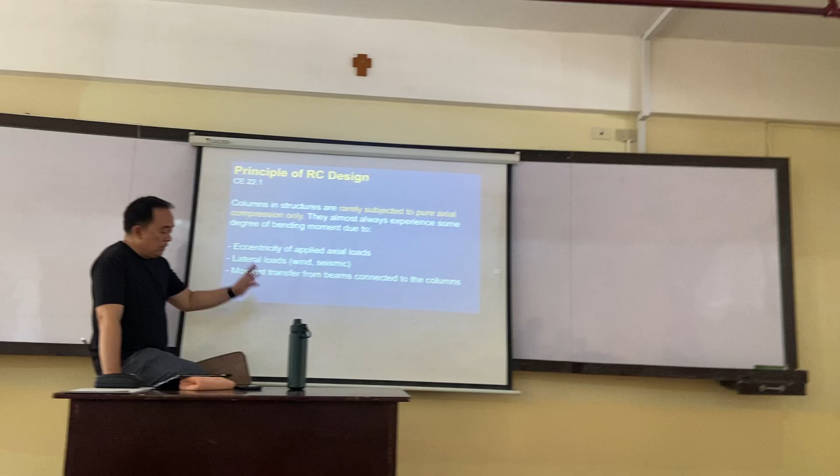It will depend on the... it doesn't mean na kung short ang inyong building, lang siya, because there are some frequencies, natural periods that we need to consider both sa structure and sa soil. So it doesn't follow nung ang buo ang inyong building atin ang magamit sa code. So you will learn more of that when you reach earthquake engineering.

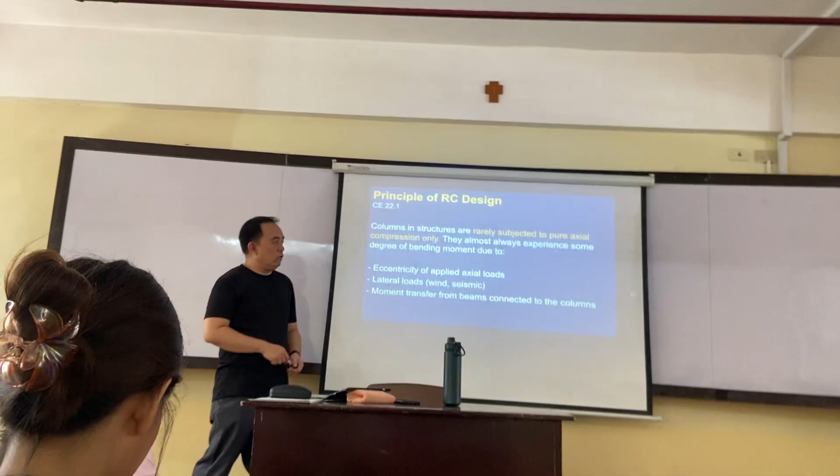And another reason for our bending moment is for your moment transfer from beams. So you had this in your C15. Let's say na ito dia or napakay. If you're going to analyze that using approximate analysis, eventually na kami makakuha kaya na may pasan dito sa graph. So in that case, your columns would actually have some deflections happening. That's why there's almost zero possibility that your columns will be in pure axial.

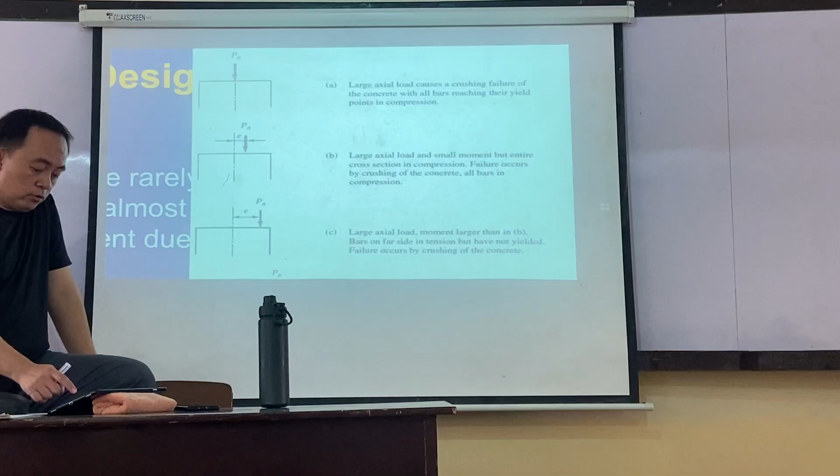Okay, so for the eccentricity of applied loads, we have here something like this. Of course, theoretically the loading will pass through the centroid. We already know that. And then, if there will be an introduction of small eccentricity, it will have a large axial load but small moment. So the failure will occur by crushing. So it's almost the same, crushing po siya. So wala kayo problema if gamay ang atong eccentricity.

And then of course, as the eccentricity will increase and eventually it will be too large, in that case your column will now behave as a beam and it will fail as a beam. So dapat siya that time to control in case there are very large moments. So of course we want our columns to be compression controlled because compression will be axial.

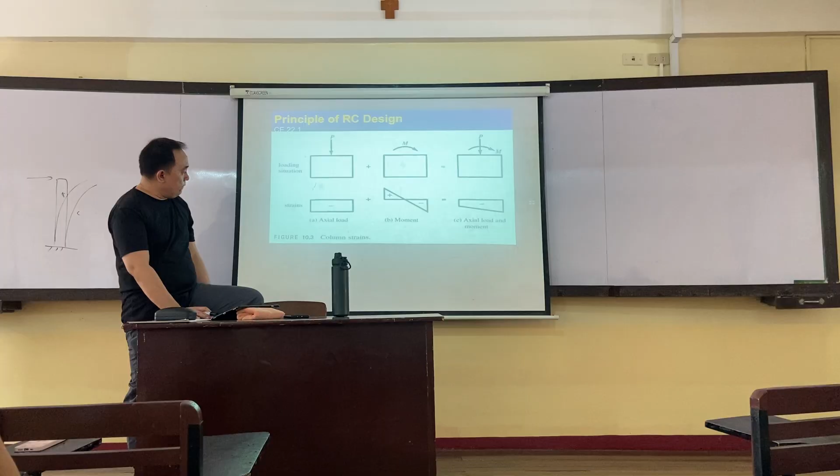Okay, so these are the column strains. If it's purely axial, you will have something like this, a straight line strain. This is all throughout the section. But if you introduce moments, I think you're familiar with this. So you will have some strain both sa concrete and the steel. But this is just for the strain sa mga outer fibers, steel fibers and concrete.

And eventually, if we will combine that as a superposition, you would have something like that. The axial loads and the moments where it will have something trapezoidal, if you're going to add this. And of course, you have different values of your axial loads and different values of your moment, even with the same cross section. And so there will be some variations in between. P plus M.

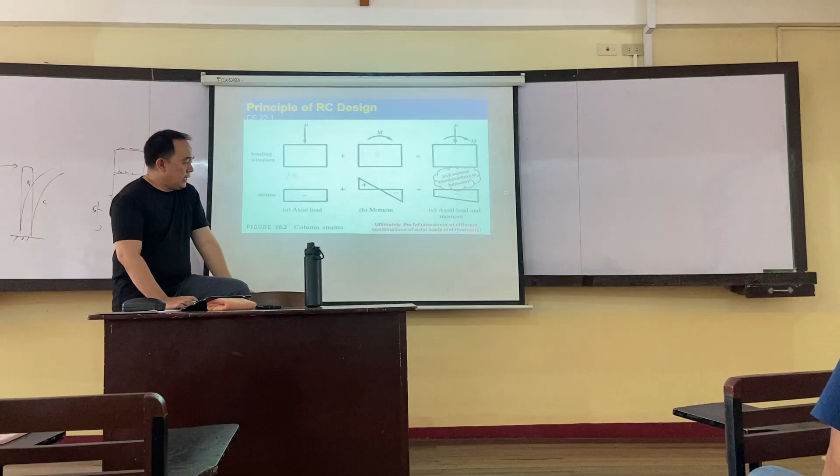And ultimately the failure will occur at different combinations. So pwedeng gamay si P, dako si M, pwedeng dako si P, gamay si M, or somewhere in between. So isa na combination of your P and M. So the way to simplify or medyo musayon na ang atong computation is to approximate our column capacity with the use of this column interaction diagram.

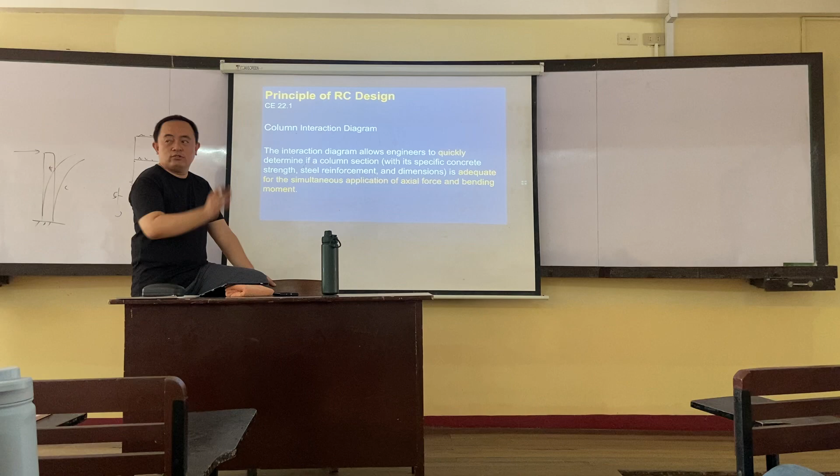Kung RCD na graph. Mga ni-indicate mo nila graph sila kuha sa PM o sa number of rebars required for a particular column. So what's this column interaction diagram? This allows engineers to quickly determine if a column section is adequate for the simultaneous application of axial force and bending moment. Once an interaction diagram is generated for a specific column, we highlight this because this is the problem with interaction diagrams.

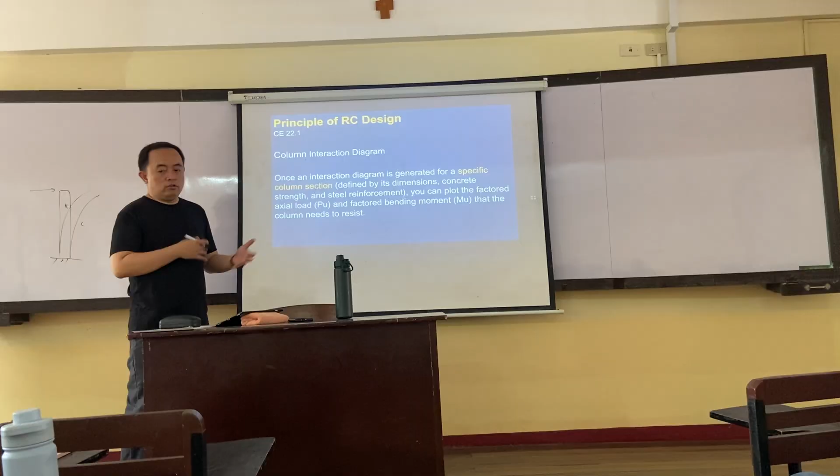So need siya to use a specific column, f'c, material properties, symmetry, steel properties, fy, and something to do also with the ratios and the dimensions of your column. So there are dimensions, strength, and steel reinforcement and strength. So there are parameters that need to be consistent between the column that you're designing and the one you will see in the interaction diagram. Dapat coincide siya in a way.

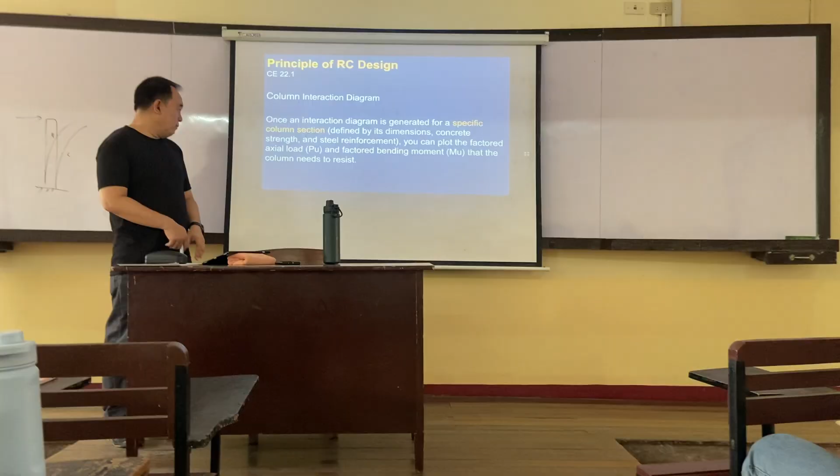So once you have that diagram or interaction curve from other sources, you can plot the factored axial load and factored bending moment that your column will need to resist. Actually, di man necessary na factored. Pwede man siya NM or PM. In fact, the axes of that are P and M. If you want to introduce reduction factors, you can have your Pu and Mu. So it should look something like this.

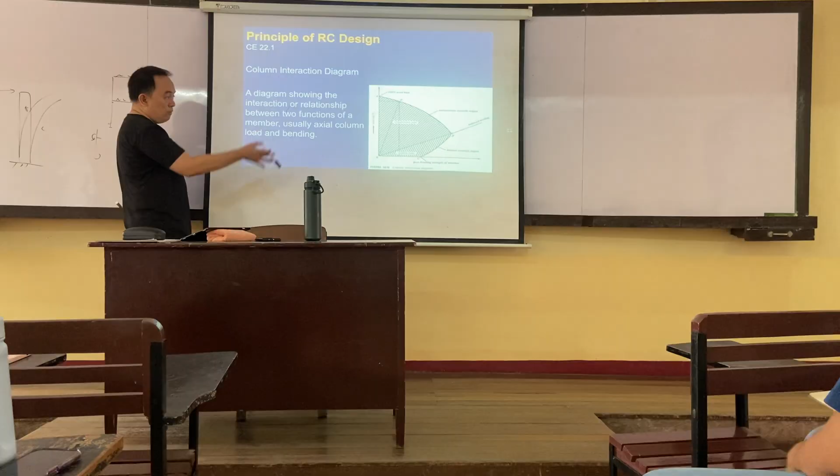Although this is the generic form, just to introduce you to the components of your interaction diagram. Okay? So, your interaction diagram by definition is a diagram showing the interaction or relationship between two functions. So, on the sides, you will have your axial loads and your moment. Okay, and then somewhere in between, you will have some combinations of your axial load and bending moments.

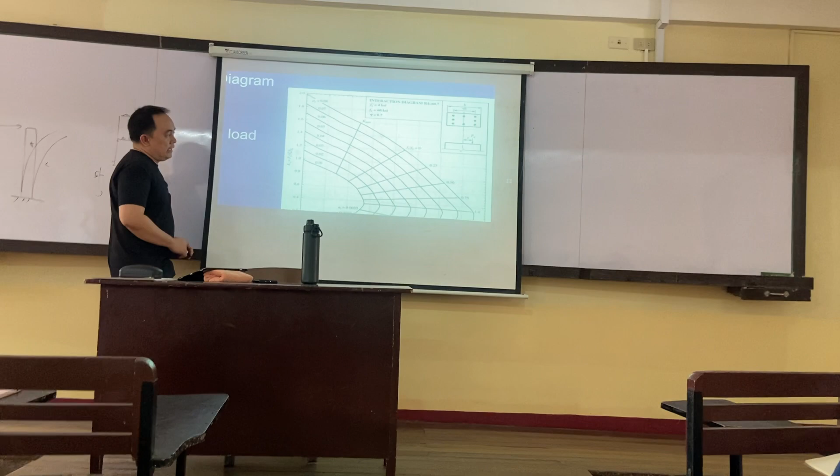Okay, and then of course, to properly use our diagram, we will have something like this, which will be generic to most of the columns. For example, in this case, if the rebars for a column are spread all throughout the faces, you can use something like this. So likewise, and more of this. Okay, and then of course this one will have your ratio. Okay, so

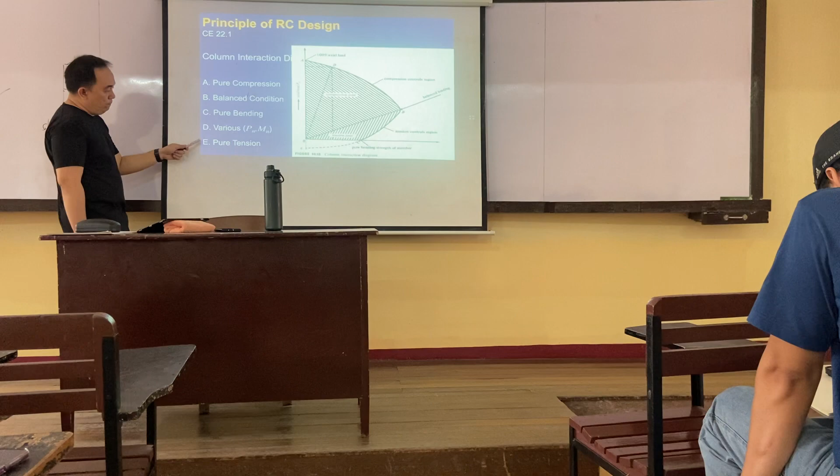Your diagram is generated by various strain distributions, from pure compression to pure tension. So your interaction diagram will have basically 5 zones or 4. You have your pure compression here at the top. The y-axis is for the axial load only, and the x-axis is for the bending or the moment. So of course here you have zero moment, so everything here is purely axial. So you have your compression. And then somewhere down below there is your pure tension, opposite to your pure compression, on the same axis.

Then going there, your columns will now have moments, again due to the eccentricities of your load application. So you will have point C as pure bending, where the y-axis is zero. So you will have your bending. But of course, as with your beam, you will have something like a balanced condition. So balanced loading should be somewhere here, depending on the point. And of course, somewhere in between values, you have your point D here. So that's your interaction curve.

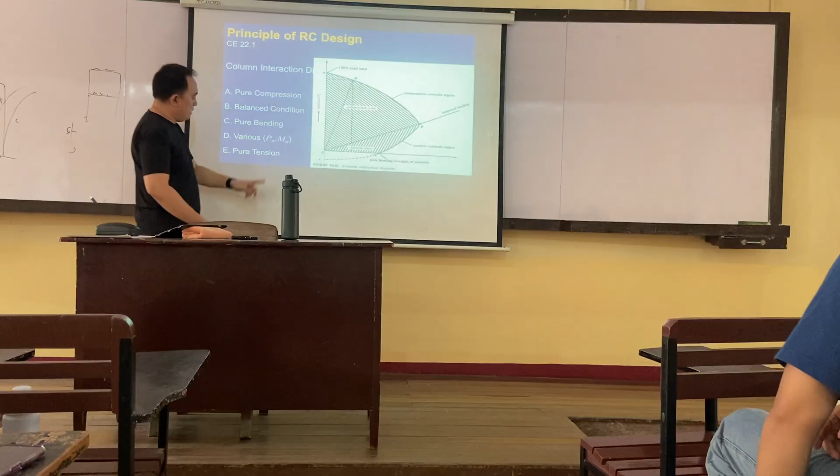The coordinates are Pn and Mn on the axes. And you notice that the pure tension area is in a broken line, because we do not want especially your RC column to be in tension, because concrete is weak in tension. So we do not want our design to be in this portion. And then this is your balance line, balanced condition. Everything above that will be compression, and everything below that will be tension. And then we'll have another line that says everything up will be brittle, everything down ductile.

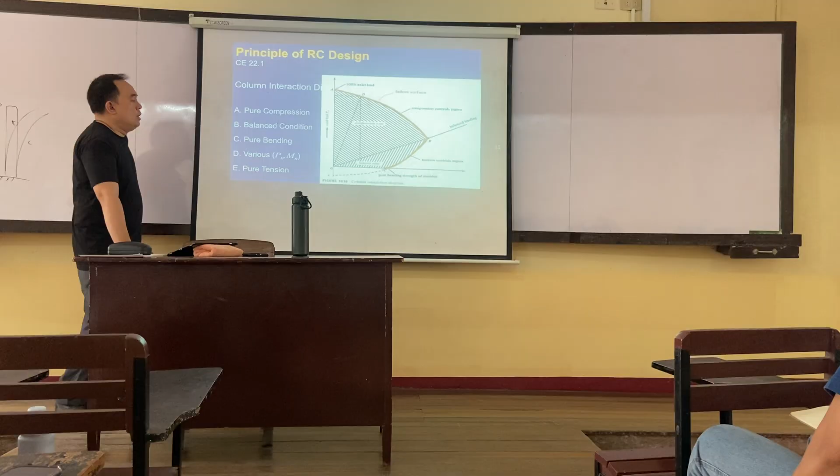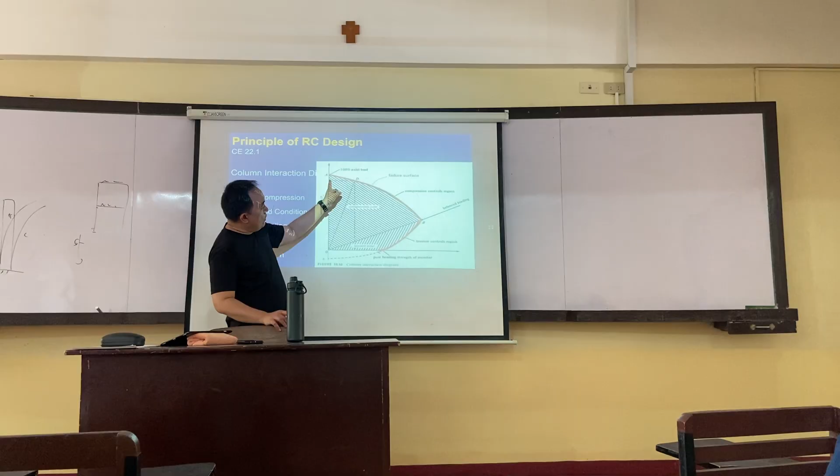And actually your interaction diagram will also tell you the failure surface of your column, basically a boundary of your column, because your interaction diagram will vary from column to column. Each column might have a different interaction diagram, so it will have a different interaction diagram. Regardless, the boundary here will be your failure surface. And whatever the loading or the moment that you're going to compute for a particular column, it should not go beyond that boundary.

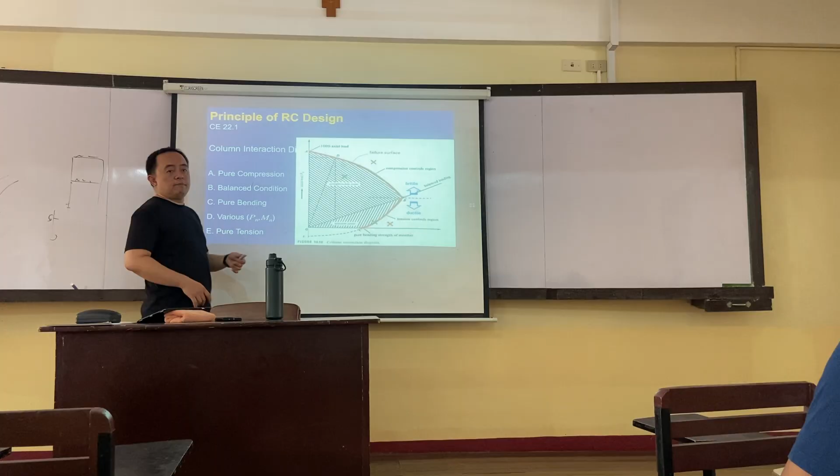So for example, in case your Pn is computed somewhere here, but the moment is too high, you will be outside, so it fails because it goes beyond. If your design is somewhere here, Pn is high but the moment is small. So this is what we should target: large compression, small moment, so that your column will not act as a beam. Especially in the compression zone. If the moment is high and P is small, that's no longer allowed as a column; it acts like a beam. So this is what we identify for our design.

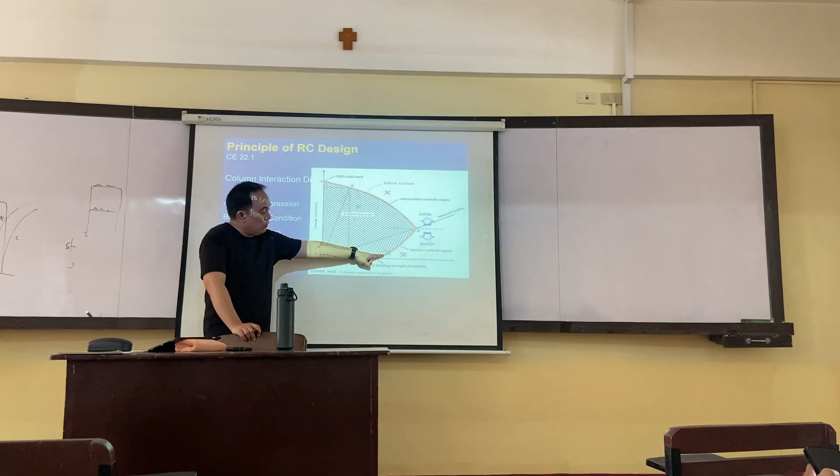Okay. Now what if it's just right on the failure surface? Is it okay? So the answer is yes and no. Because if you notice, these are Pn values and Mn values, the nominal values. So once you introduce your reduction factor for our design, this column will no longer be applicable, because once you introduce reduction factors, your failure surface will go down. Like 65% for a column in compression. So that's the reduction.

So you have your 35% allowance in case something goes wrong. For beams, we have no choice because we need our beams to yield first. But in essence, the beam should fail first before the column. If the column fails first, that's bad for you, because then your structure collapses, even though the beam is intact, the column has already crashed.

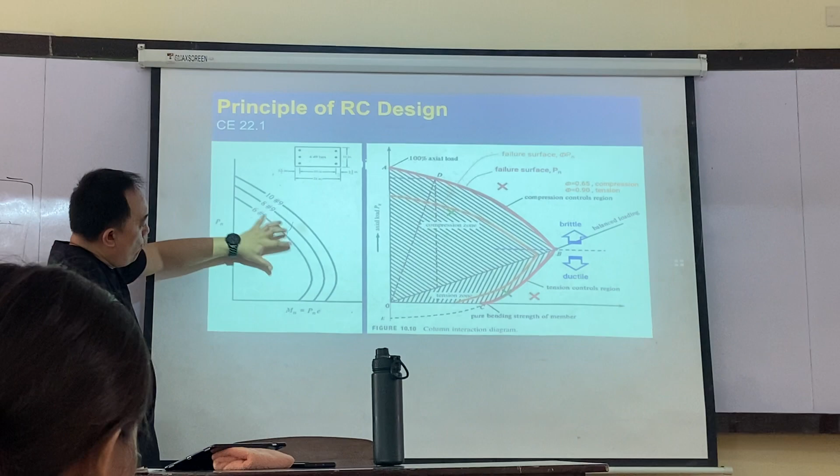So you will have an interaction diagram that should look like this.

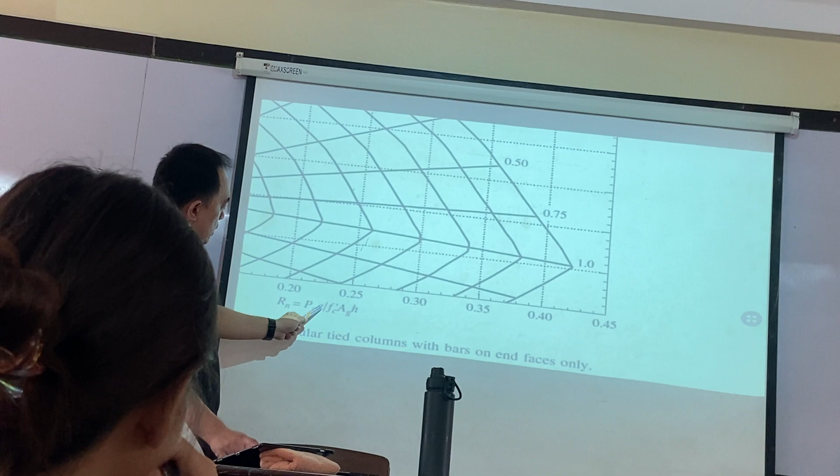We introduce eccentricity for the moment. Of course, our moment is P times E. To have a moment, there must be eccentricity. And of course you will have your H here, because your E will depend on, for example, the center. So our E will depend on the dimensions here. Later on we will have some ratio of that.

So this is somehow a generic interaction diagram for use with rectangular columns, and its configuration for rebars is like that. Rebars can be placed all throughout your column, all four faces - that one is for rebars on all four faces. Or just the end faces only, basically two faces.

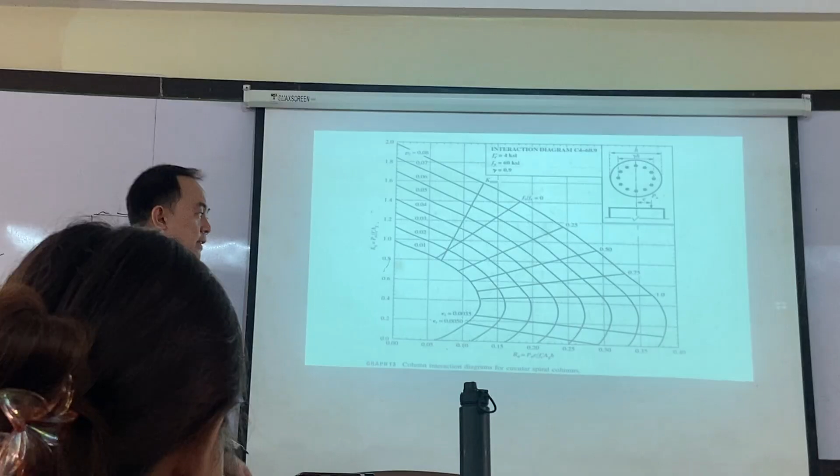And then you will also have circular columns. If the column is circular - if you work with the DPWH code as a bridge designer, our bridge columns are called piers. Most of those are circular columns. So you will have something like that.

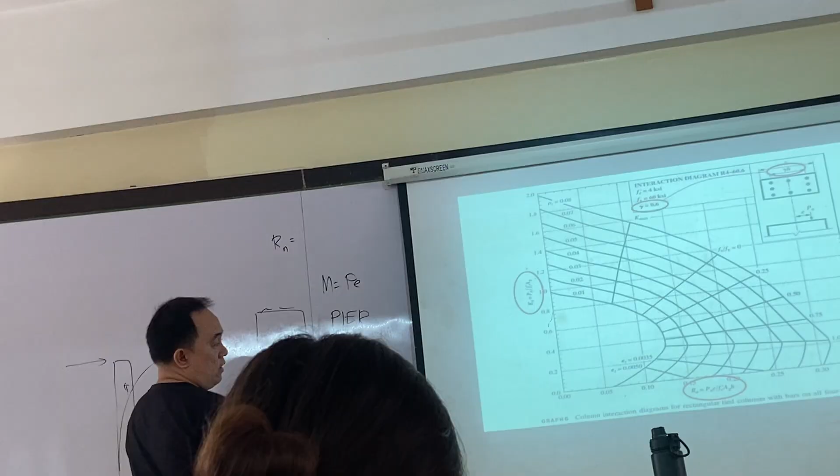Notice here, gamma. Your gamma will be important later to locate your E. So what is this? This gamma here is the ratio between your two H's. The second H will be the centroidal distance of your end bars, versus the overall depth or height of your column.

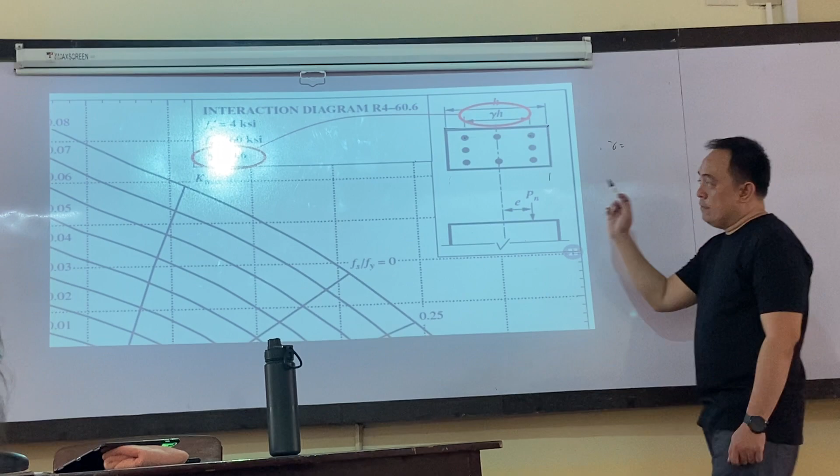So that gamma is always less than 1. So the denominator for the gamma is the smaller one. Let's say this distance here divided by your H gives you your gamma value. This gamma value is one of the things you'll need to know later on how to use your interaction diagram.

In the older versions of our code, you will see that it's a bit outdated, so just in case, we will not use this one. What we'll use is this one instead, which is simpler. This one - just in case it comes out in your review - so take note of it.

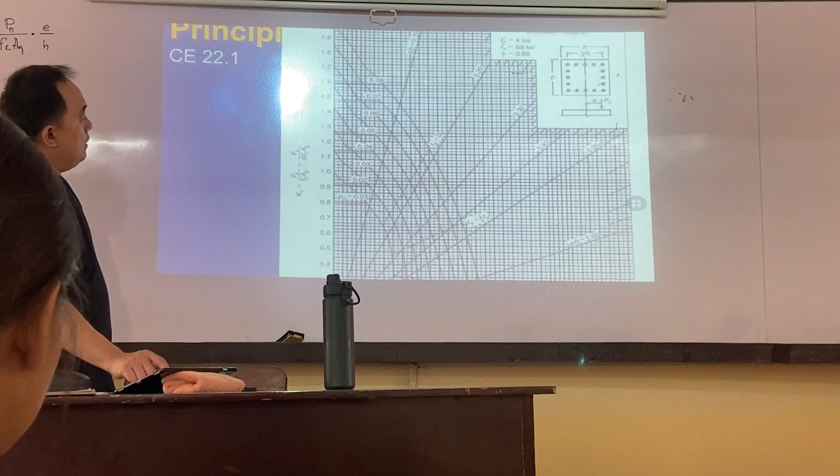So we have here the same - you also have your PN over FC times Ag times your E over H. So it's the same approach, and this one also the same approach. What's different here is way back, the ACI was using the E over H ratio.

So where is that? It's this one - you pick the line here, that's your E over H ratio, which you compute first. Then you find the corresponding value, and then you can compute for your PN. But the idea is the same, though what we're going to use are the newer versions.

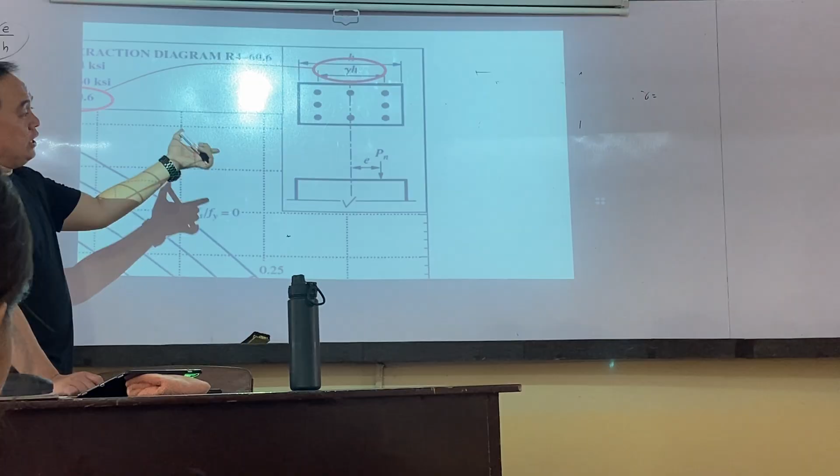So be cautious now - be sure that the column picture at the upper right side of the interaction curve matches the column you're considering. As I said earlier, if your rebars for your column are distributed all around, you will use this column as long as it's rectangular or square. But if by chance your rebars for a rectangular or square column are arranged differently, there are cases where that needs to be done.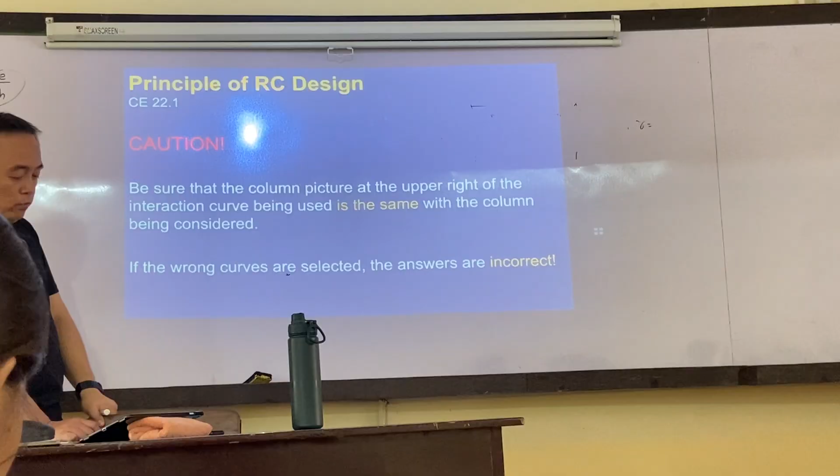You will only use it depending on the design of the column. Okay, and the wrong curves are selected and the answers are, of course, incorrect. So let's have some example on how to use our interaction diagram.

We have to determine the steel reinforcement required for the short column, and it will support the following loads: 1,660 for the axial load and 310 kN for the moment of bending of your column. The bending here is about the stronger axis. So if this is X, this is Y, so the bending about the stronger axis is about X.

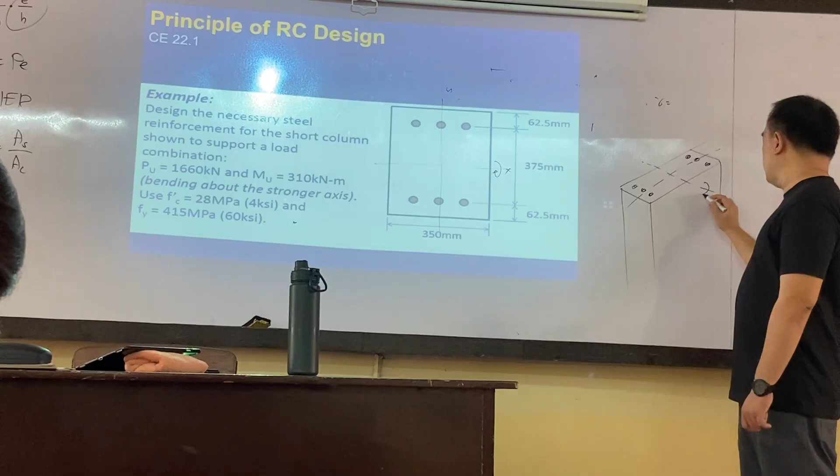By the way, for interaction diagrams, the location of your P, or basically in the discussion for bending, the location of your P is not the regular centroid that we see in the geometric shape. The problem with reinforced concrete is that it's made of two materials. So you have your concrete, and then you also have your steel. So the centroid of those things, steel and concrete, may not always coincide.

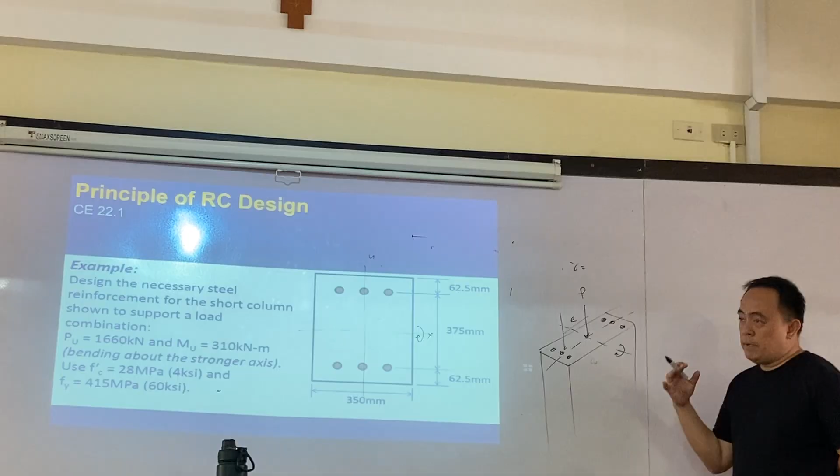It will depend on the shape of your column. So that centroid we're talking about is not the geometric centroid, but rather it's the plastic centroid, not the geometric centroid.

So it will differ based on the number of your rebars and based also on the shape of your concrete. There's a separate discussion for that, but I'll skip it because we do not have time. But in any case, if you recall, I introduced last time an L-shaped column, and...

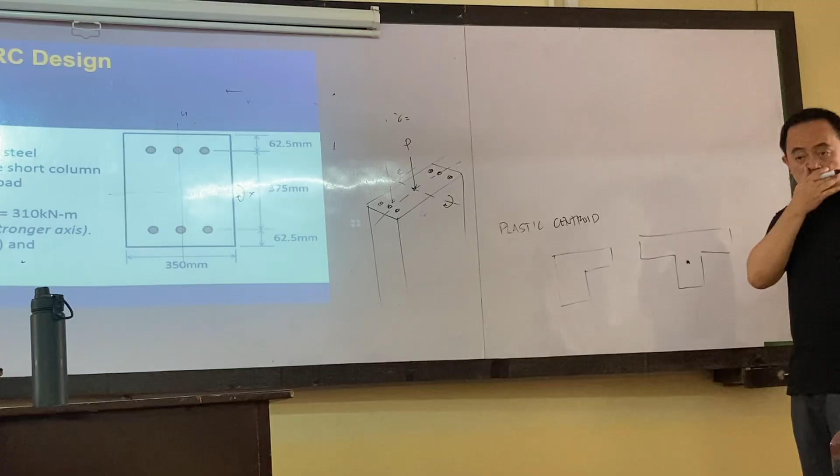...point P. So the geometric center of this is here, right? So if it has rebars, it will no longer be here. It's somewhere here, or maybe here, or I think it's mostly here. But in the case of a rectangular, square, or circular column...

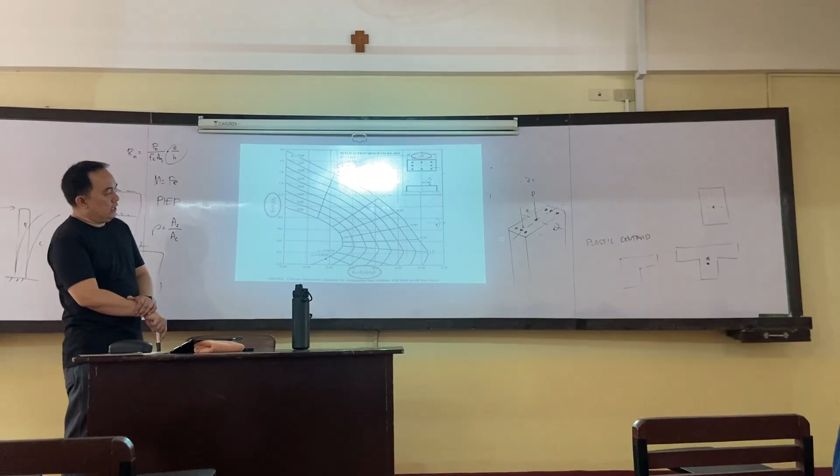Now, one thing you need to consider is that what we have in our book is, of course, taken for American usage, for those who use English units. Unfortunately, the US still uses US or English units, while everyone else around the world is now using SI units.

So in order for us to use this, actually one of our activities was supposed to be to create an interaction diagram using Excel, because we can compute our values here, since it's pure compression.

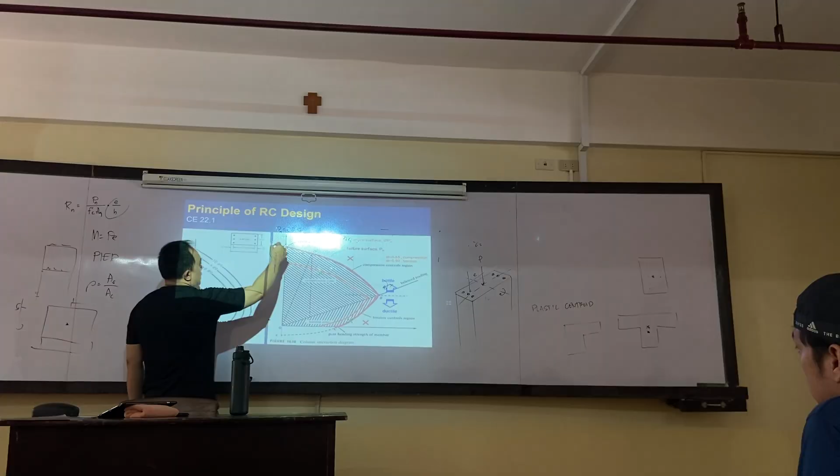So you can use Pn equals 0.8 of Po, where Po is 0.85 f'c times (Ag minus Ast) plus Ast times fy. And then for the Pu, 0.65... So that's the pure compression function, and you can compute for this value here.

For the bending moment, or pure moment, you can also compute that. It's similar, Mn equals As times fy, or if it's in terms of concrete, you will have your 0.85 f'c times b times a, times (d minus a over 2), so that they are consistent, in terms of concrete.

And then you also have your balanced values, whatever they're called, balanced something. So you can compute these things here, and that's why for every column you can have your interaction diagram.

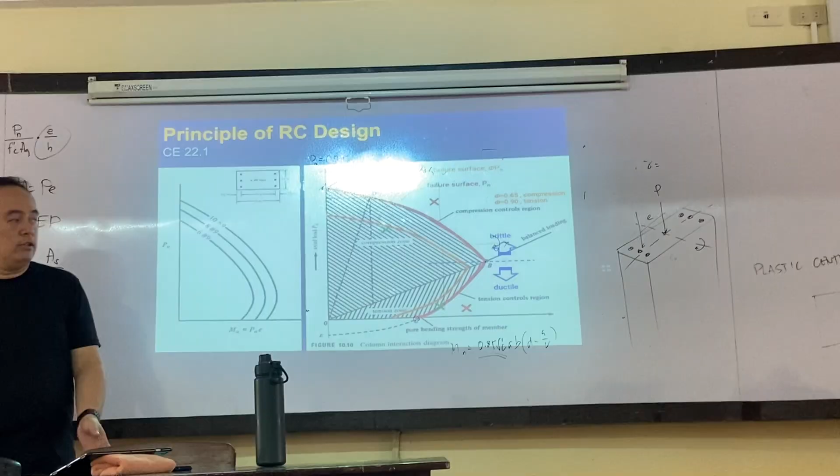So supposedly, that's applicable here. I think some students from a certain class were able to make an Excel sheet with their values, so they could just plug in the values there. But in our case, we don't have that.

So therefore, I'm just going to tell you how to use the interaction diagram directly.

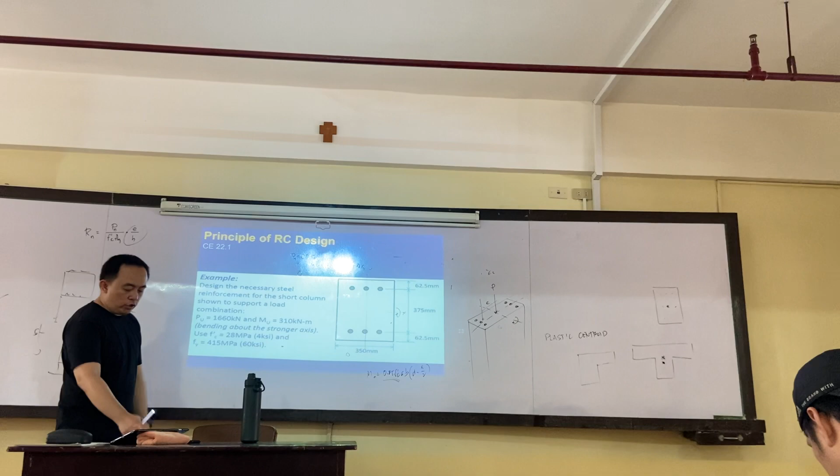Okay. So back here we have our f'c, no? So since English ang atong diagram, we are going to convert it. The diagram will be the one with 4 ksi value. So, okay. And then ang atong fy is dapat 415 or 420. That's for grade 60 or 60 ksi. So, the same thing, 60 ksi. Okay. And then, ang gamma will vary later.

Okay. So, what about if 21 megapascals for grade 40? You cannot use this. Okay. You cannot use that. You need to look for another, or you need to make your own. That's why most examples you will see in the use of interaction diagrams are based on 4 ksi and 60 ksi for f'c and fy.

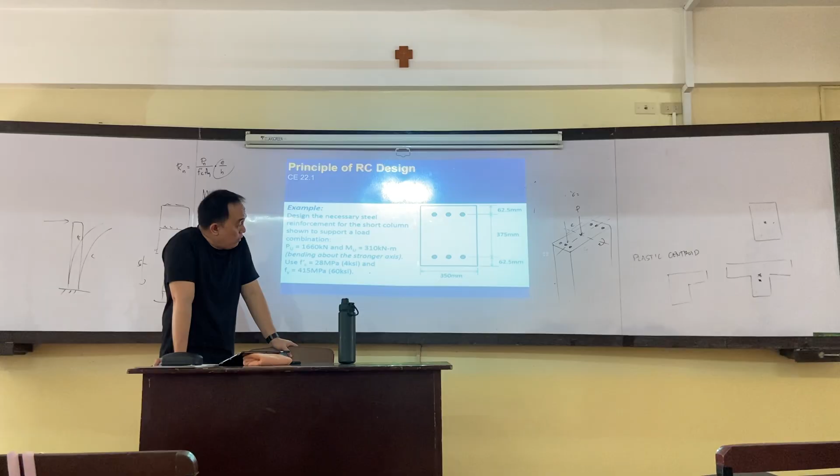Okay, so we have the following distances then. Your cover, edge to center distance of the bar, is 62.5 and 62.5. So basically this is how much? 500. So 500 siya total. So your h is basically this one, 62.5 plus 375 plus 62.5. Of course your b is 350. Okay? So how do we do that?

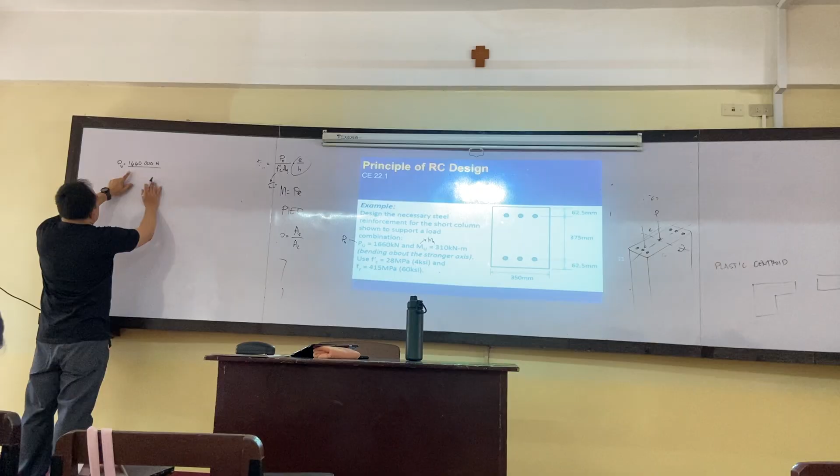Get the corresponding loads first with its nominal values, and then get this ratio, our Kn and our Rn, so that we will be able to plot on the diagrams for interaction. So Pu is 1,660. We're going to divide it with our f'c in newtons per millimeter. And then the direction na lang, Pn, so it's on Pn.

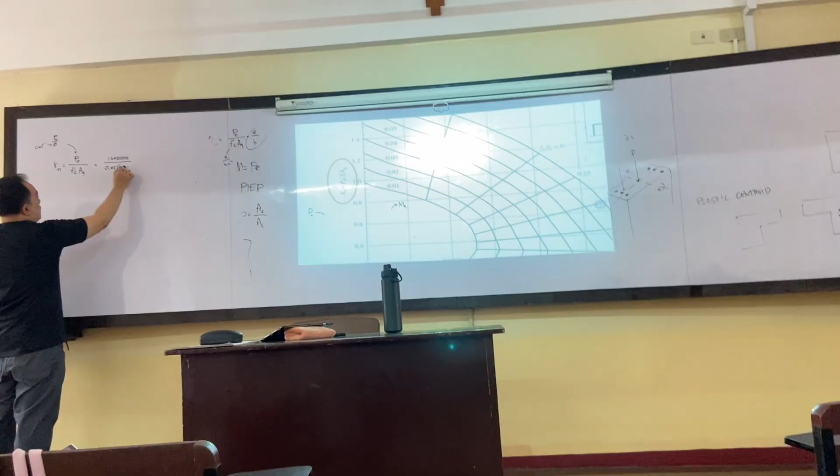You have your Pn divided by f'c times the gross area of your concrete. But of course, Pn is Pu divided by our reduction factor. So our given is 1,660, divided by 0.65, because the expression is 0.65 times your f'c of 28 times the gross area, which is 500 by 350. 1,660.

Okay, so by the way, this ratio should be unitless. It's a ratio, a normalized value, so it should be unitless. So we have newtons here, and then newtons per square millimeter times square millimeter, which is newtons. So it's a unitless value, wala na siya unit.

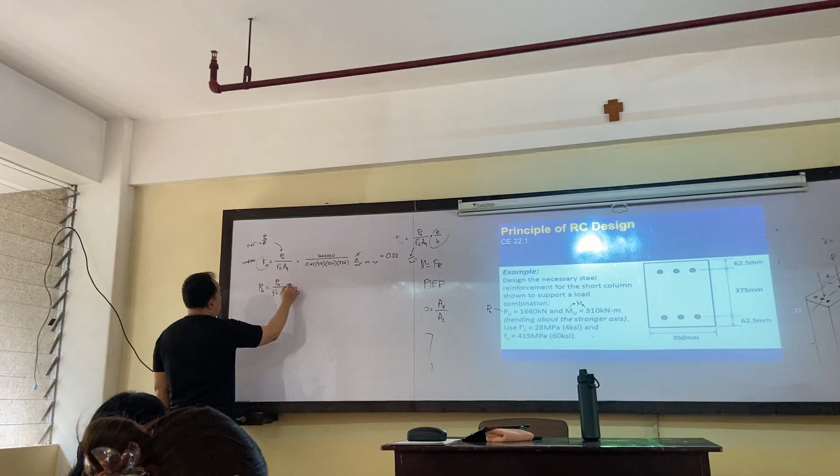Your Rn. Rn is Pn times e, but I'm used to writing it this way, divided by f'c times Ag multiplied by your h. So 0.65 times 28 times 500 by 350 times your h. Now, what is h? 350 or 500? 500.

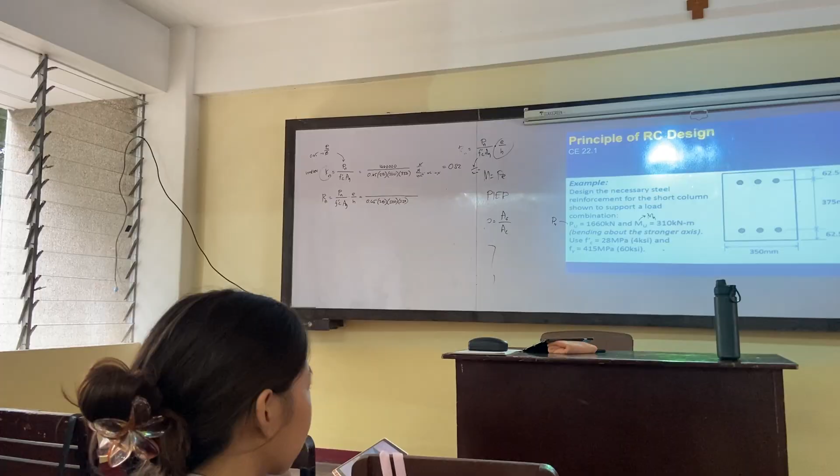That's because the instruction there is specifying bending about the stronger axis. So, based on our definition of geometry, our longer dimension will be the h. So our eccentricity is somewhere here. So, therefore, our h is this one. So you should have 500 here. And then you have your Pn, 1,660,000. But what about e? What's e?

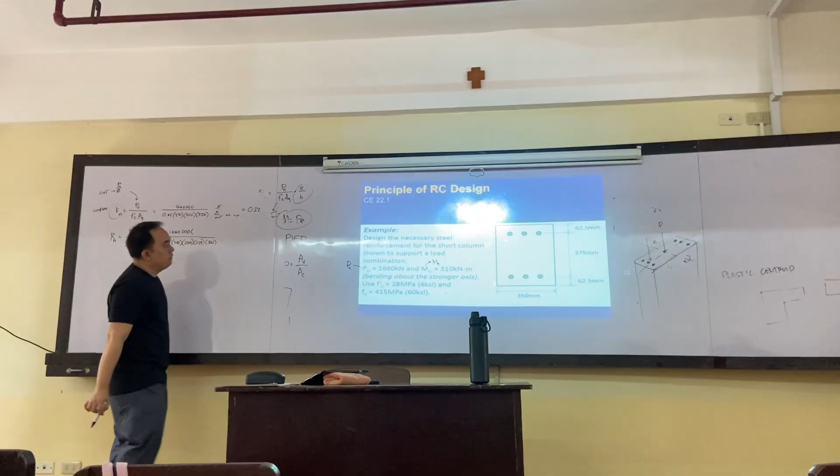How do you solve for e? Longer or stronger? It says bending about the stronger axis. If it were bending about the weaker axis, we'd lay it down, so our b would be somewhere here. So bending about the stronger axis, that's why small details matter. Okay. So how do we solve for e? From here, your e is equal to M over P. So what's our moment?

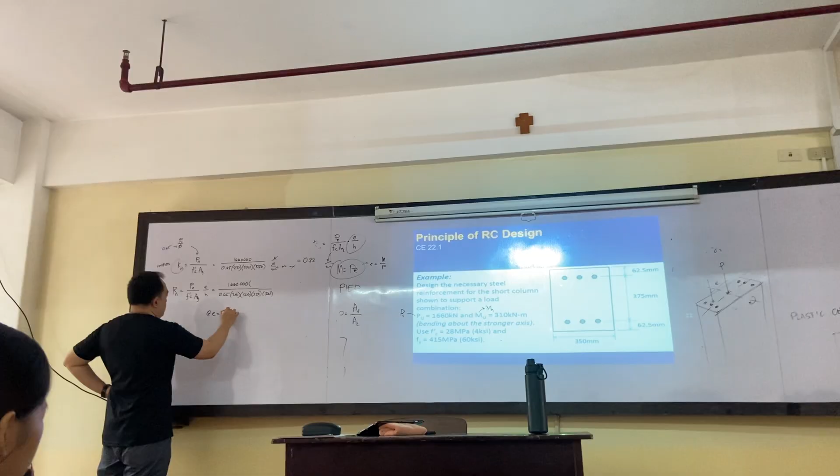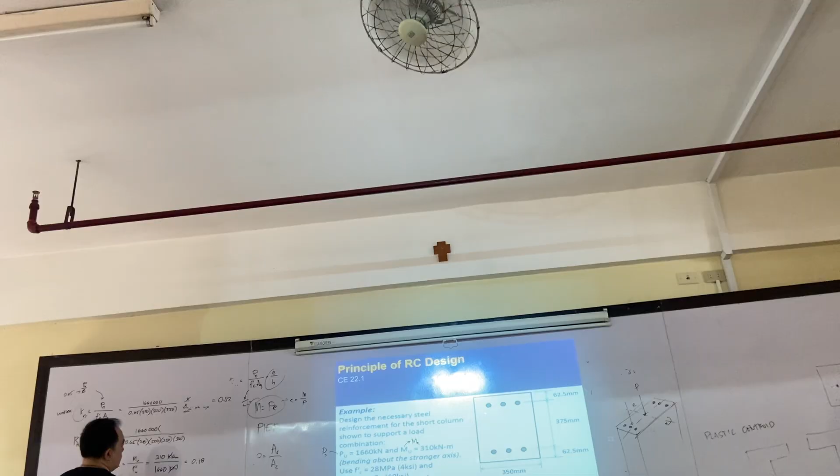e equals M over P. It doesn't matter if it's Pu or Pn because the factor will cancel out. Its unit is length, so check meters or millimeters. So we have there N divided by 1,660, so they cancel. 0.187, but the unit of that is meters. So e is 0.187 meters. We need to convert it into millimeters: 187.

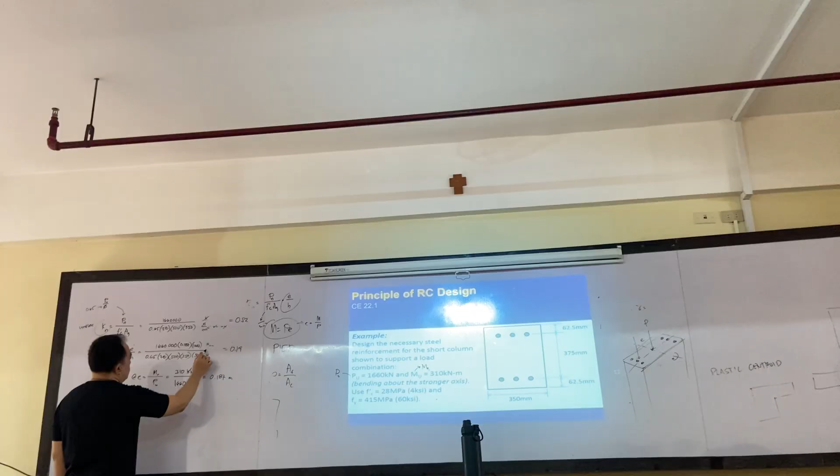Okay, and then the unit analysis here should be newton millimeter. This one here is newton per square millimeter times square millimeter times millimeter. Okay, they cancel. So we have now our values for our Kn and values for our Rn. Okay, so we're going to use our interaction diagram. But there's one thing that we need to look at first before we could use our diagram.

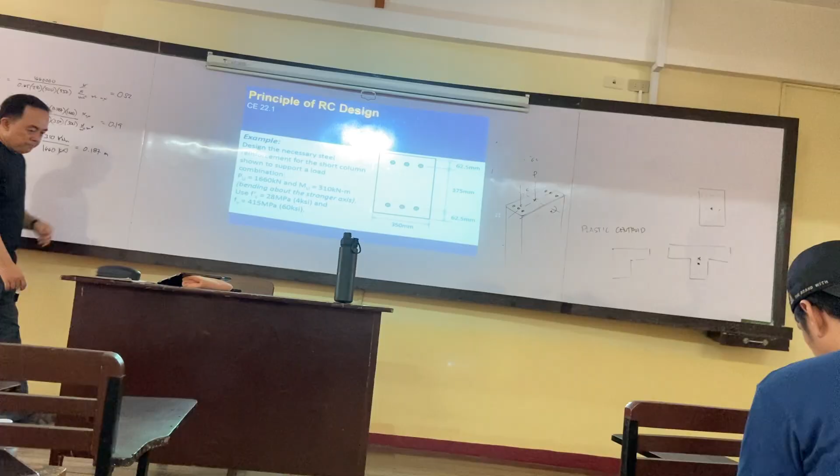So we actually need our gamma. What's our gamma? This one. Gamma should be less than 1, so it should be small value divided by large value. So in that case, it's this part divided by 500. 0.75. Okay, 0.75. So obviously we cannot use this interaction diagram; we need to use this one. So let's check. We have 4 ksi, we have grade 60.

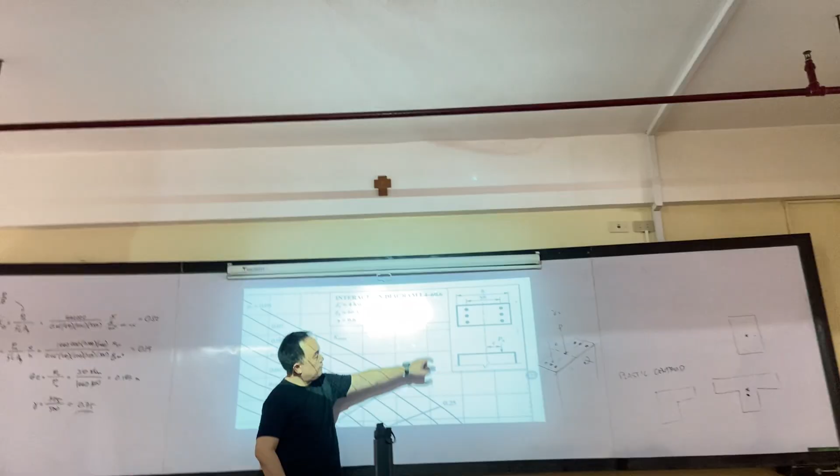So gamma here is 0.6. But we have 0.75. So they should be the same, and they should be equal so that we can use our interaction diagram. So in this case, you have the value. What's the other value I need for the diagram?

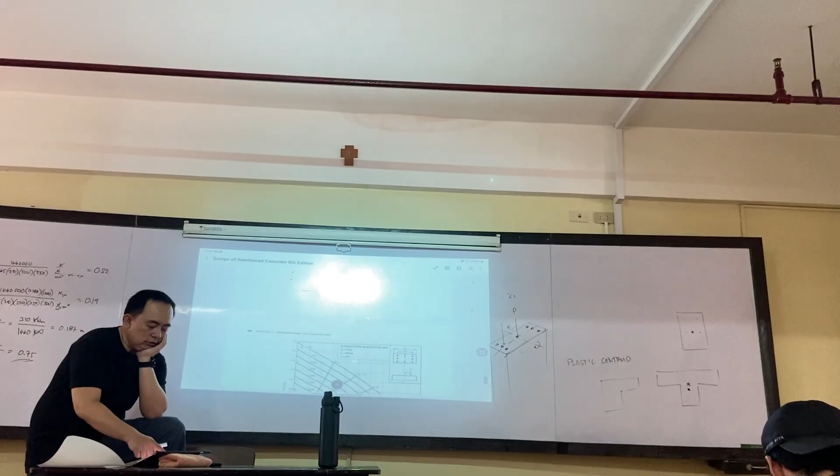Somewhere in the back is the appendices for different interaction diagrams. It will be used for the design of columns. So we're looking for rectangular end faces for the rebars. And then aside from that, we need fy 4... I mean 60, then f'c is 4, and then it should be 0.75.

But if you're going to scroll here, 0.9. None. Is that 0.8? Okay. And then we have 0.7. What's next? So again, 0.75. There's 0.6, there's 0.5. So what will happen now? It's somewhere in between. You need to consider both tables and then interpolate the value that we are looking for.

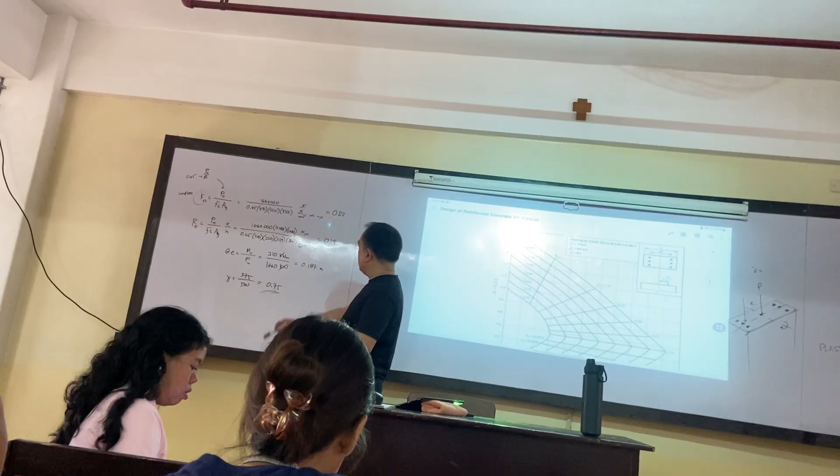So our problem is looking for the steel requirement. So we're going to be looking for the steel ratio where it hits the target 0.52 and 0.19. So 0.75, so we will use two tables or two diagrams. Use gamma 0.7 and gamma 0.8. And then we're going to interpolate our values.

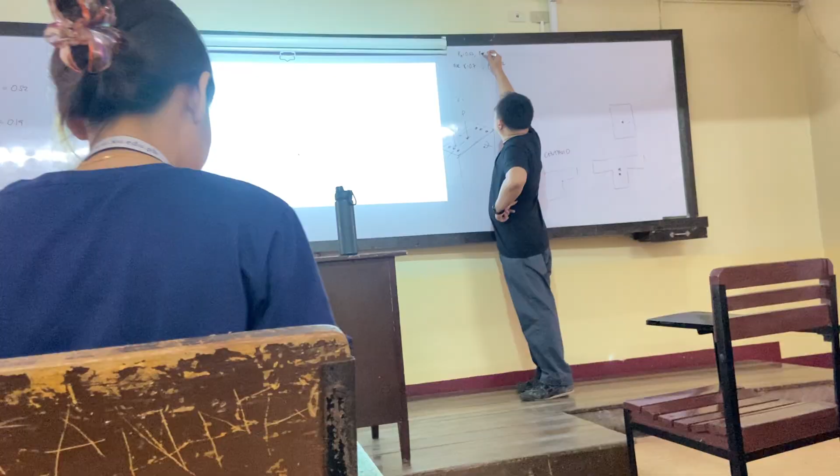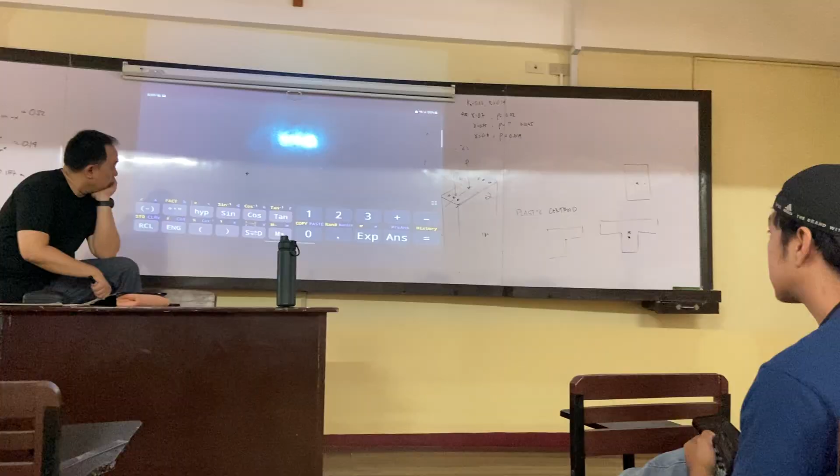So, I hope I could still remember how to use this. Interpolate. Mode, stat, mode, stat, and then you're looking at A plus BX. You're looking at linear regression, and then the input is these given values of 0.7 and then 0.8.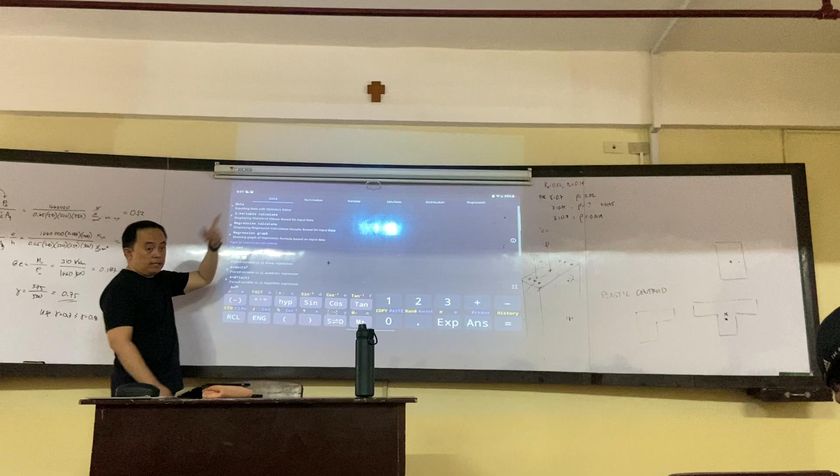And then the paired values are 0.02 and 0.019. Clear. Then shift, stat, and then you're going to get the regression value. Calculate, display the regression calculation based on the input data. That's the regression in your calculator. Input is empty. 0.07.